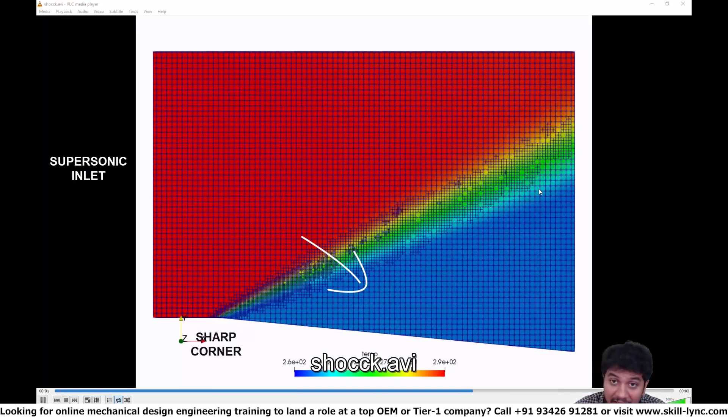Hey guys, today we are going to be solving an interesting problem. This is called the Prandtl-Meyer shock problem. So here the idea is we actually have a supersonic inflow into a duct and then there is a sharp corner. We are going to develop a lot of Mach waves. These are called weak Mach waves and there are infinite of them. Okay, and that's actually going to fan out, creating this particular pattern right here.

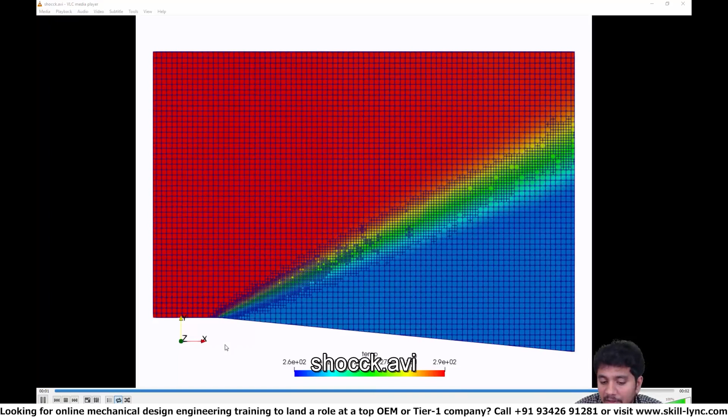So here in the leading edge, the angle that this shock wave makes is proportional to the inlet Mach number, and then the trailing edge of the shock depends on the outflow Mach number. We are also going to be setting this problem as a two-dimensional problem. Shocks are extremely important in CFD. You can see them in different applications. In today's class, you will learn how to actually set it up.

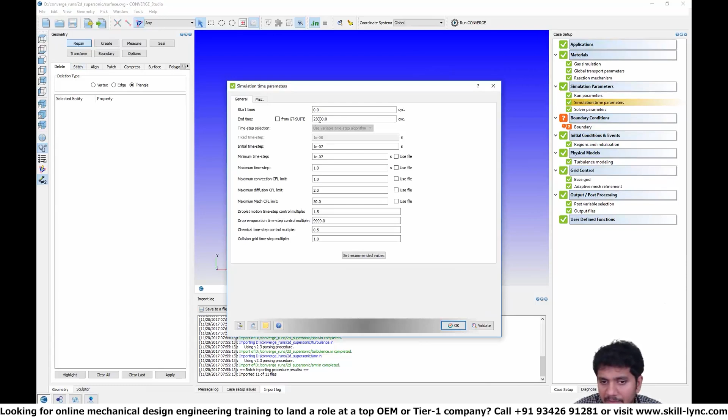So the setup is quite simple. I already have the geometry here. You have access to the STL file. So what you are going to be doing is flagging this particular case as a two-dimensional geometry. I'm not going to be doing a step-by-step tutorial here because I think we have done enough 2D simulations already. So quick run through. Here I'm still doing a steady state simulation. You can see that I'm running it up to 25,000 cycles.

All right, so I have my inlet here, outlet here, and then since it's 2D, the front and back boundaries are going to be two-dimensional, and the top and bottom walls are going to be slip boundaries. With respect to Solver parameters, I'm not changing anything. Now the fundamental difference is that at the inlet, I'm providing a supersonic inlet condition. The velocity along the x-axis is 680 meters per second. At 286 Kelvin, the speed of sound is roughly 340, so the inlet Mach number is 2.0. That is my inlet condition, and the inlet species is just air.

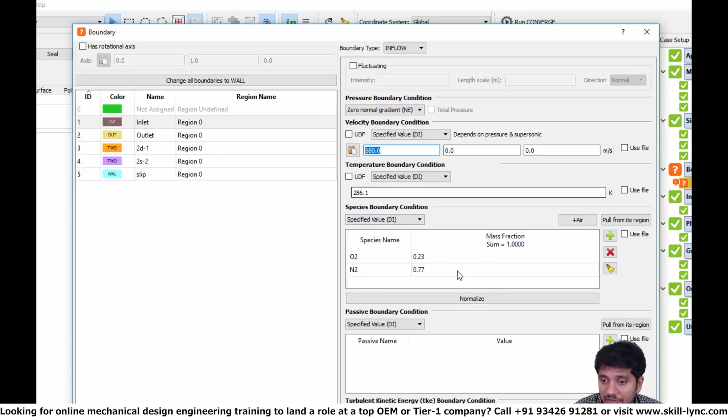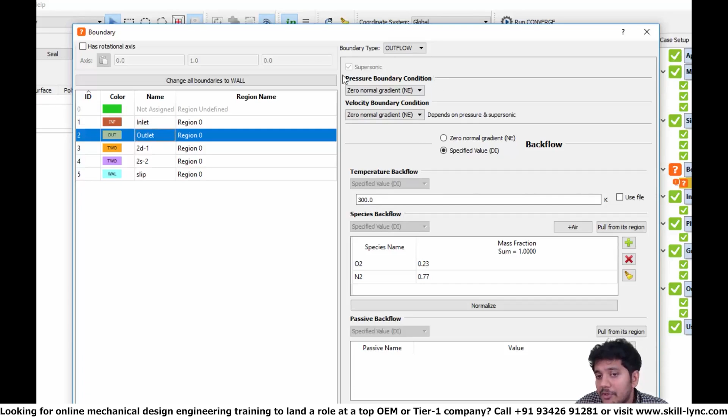Now at outlet, you can see that I'm using a Neumann boundary condition. As part of your homework assignment, you are going to figure out what Neumann boundary conditions mean. If a boundary condition is Neumann, how are values determined at the boundaries? You are going to be researching that and letting us know in your solution. The other thing you need to figure out is for supersonic outlets, why are all the boundary conditions set to Neumann? For this problem, make sure everything in your outlet is a Neumann boundary condition. With respect to 2D boundaries, there are no surprises. The top and bottom walls are slip boundaries. So that's basically it.

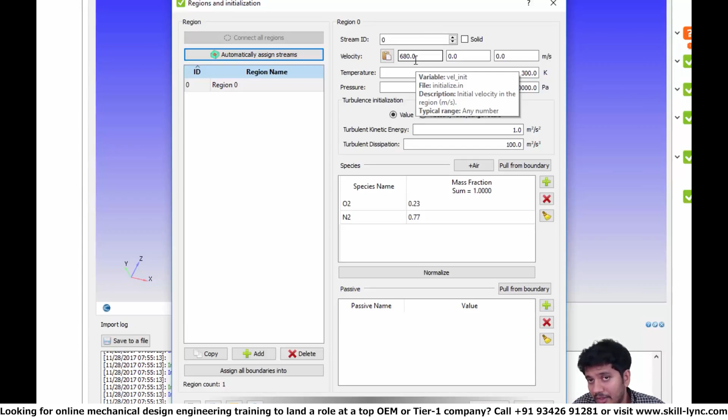The other thing that you need to pay attention to is the initial conditions. Here I'm initializing the domain with 680 meters per second. As part of your challenge, you are going to be running two problems. In the first, you set the initial conditions as 100 meters per second, which is subsonic, and in the second attempt as 680 meters per second, and you are going to tell us how the results change. For turbulence modeling, I'm selecting RNG k-epsilon. We have not talked about turbulence modeling yet, so in this case we are using the default value.

So the next thing that we need to talk about is the base grid. The base grid for this problem is 0.8. I'll enable the bounding box here so that you can see the dimension of the geometry. For this dimension, my base grid is 0.8 and I'm having the same base grid size in all three directions. Now the interesting thing that we are doing here is we are enabling adaptive mesh refinement.

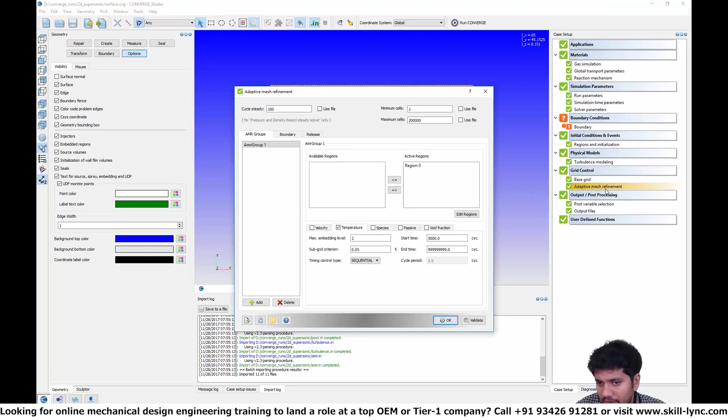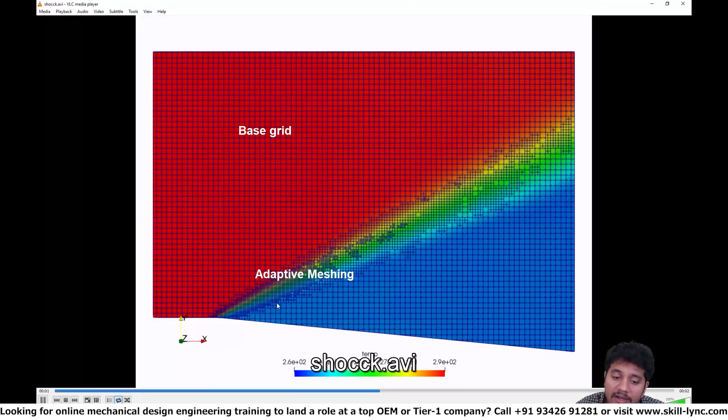What is that? So if I go back to this video, you can see that in certain areas the mesh is fixed, whereas the place where the shock occurs, you see that we are using finer cells. This is called adaptive mesh refinement, and in this particular case I'm using a temperature-based adaptive mesh refinement so that I monitor the curvature in temperature.

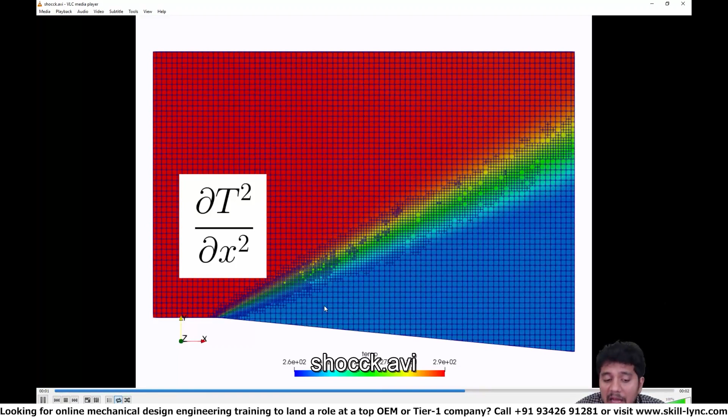So curvature means second order derivative in temperature. I'm monitoring that whenever the curvature of temperature is greater than a particular value, I refine the mesh. So you can think of this as the subgrid scale temperature. All right, so if I go back to Converge here, and if I open adaptive mesh refinement, you can see that I've enabled temperature AMR in region 0.

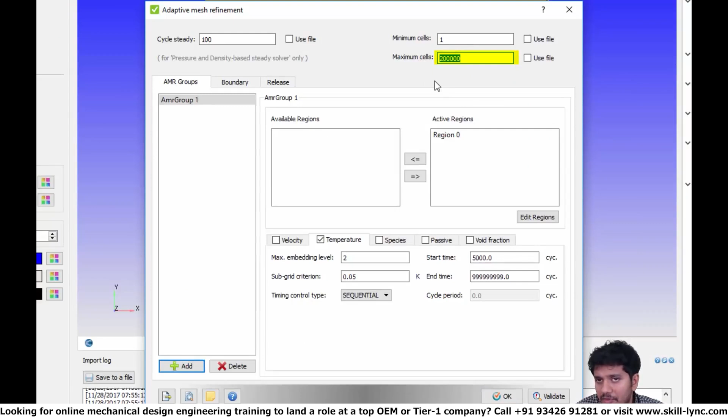So what I'm going to do is I'm going to tell you how I set this up. So I went to grid control and I made sure that adaptive mesh refinement is first checked. Once adaptive mesh refinement is checked, I click on AMR, and the first thing I do is I basically set the maximum number of cells that I want. In this case, I'm going to start out with 200,000 cells. So that is the maximum cell count possible.

And then I'm saying that AMR is available in only region 0. So by default, you would see something like this. What you need to do is you need to select your region and place it under the active regions. Only then AMR is going to be active. Then we are going to be choosing the type of AMR. In this particular case, you can choose velocity AMR or temperature AMR, because when a shock occurs, both of these quantities are going to change a lot.

So what I'm doing is I'm using a temperature AMR, and the subgrid scale temperature difference is 0.05 Kelvin. So whenever the subgrid scale temperature is greater than 0.05 Kelvin, AMR is going to refine. And the maximum embedding level for AMR is set to 2.

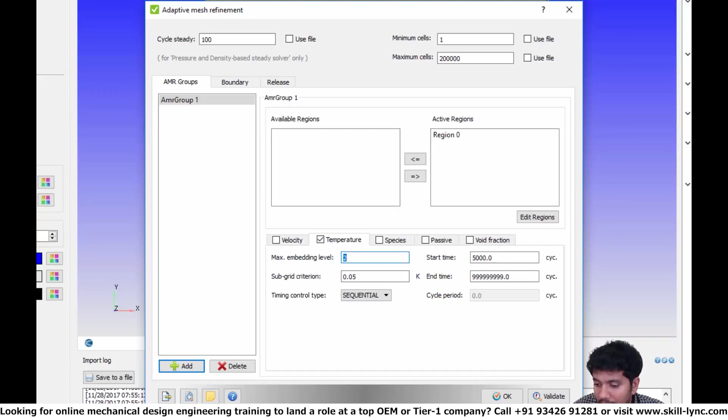So if I open up this video, you can see that this right here is your base grid. And if I pause the video somewhere here, you can see that from the base grid size, this is your first level of refinement. That is, if you have embed scale of 1, this is the refinement that you will have. If you have embed scale of 2, everything is going to get refined one more time.

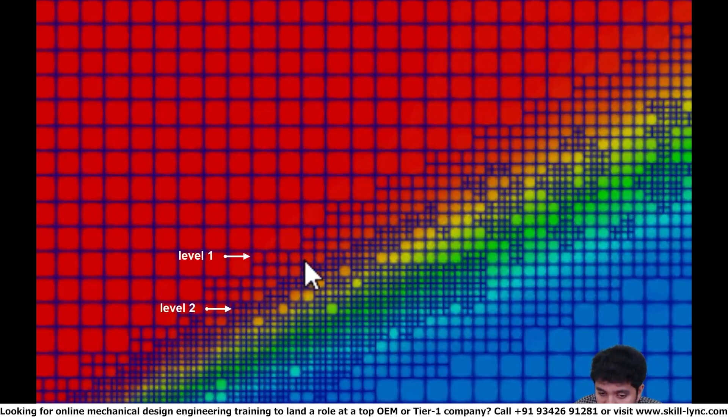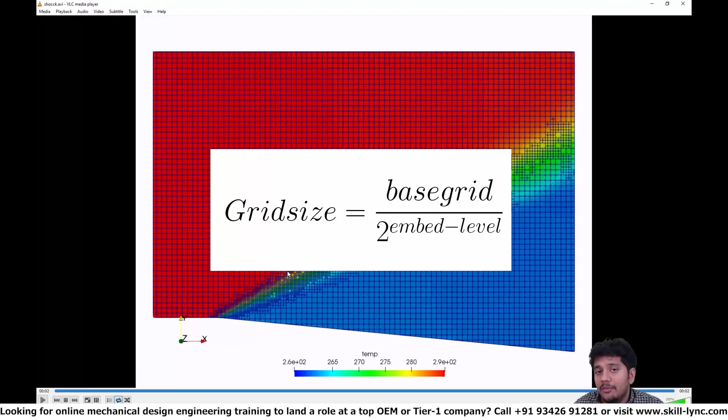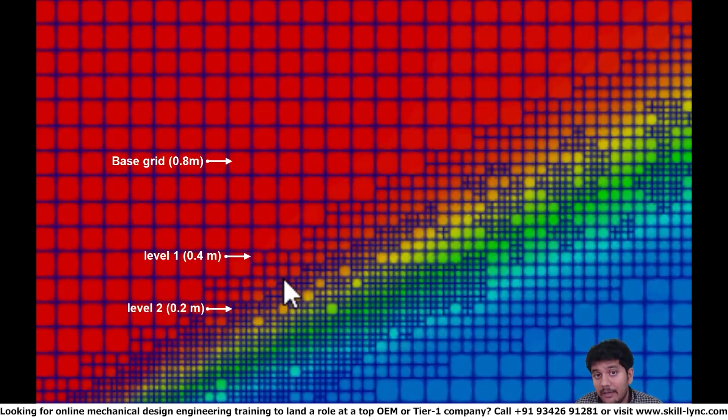Like I said, Converge uses an octree data structure. So the refinement formula is quite simple. If your refinement level is n, then your grid size is going to be base grid divided by 2^n. Since our base grid is 0.8 meters and our embed level is 2, the smallest grid size is going to be 0.8 divided by 2^2, which is 4. 0.8 by 4 is going to be 0.2 meters. So that is the smallest cell that we will have in our simulation. Now, if you increase the embed scale, your cell sizes are going to get even smaller.

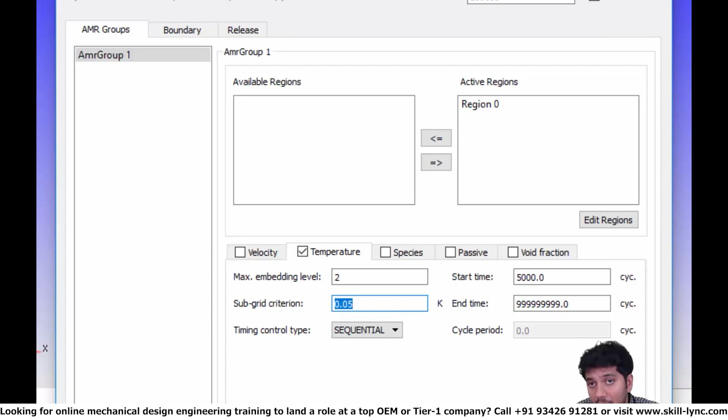And then with respect to subgrid criterion, I want you to use different values for the subgrid scale criterion to understand what actually happens. That's also part of your assignment. So once I OK this, that's basically it. I export my simulation and then I run it. Now at this point, you must be extremely comfortable in running the simulation and post-processing the simulation.

So in this particular case, what I'm doing is I'm plotting the temperature. You can look at velocity. You can also look at the Mach number to see how it changes. So that's going to be your assignment for this week.